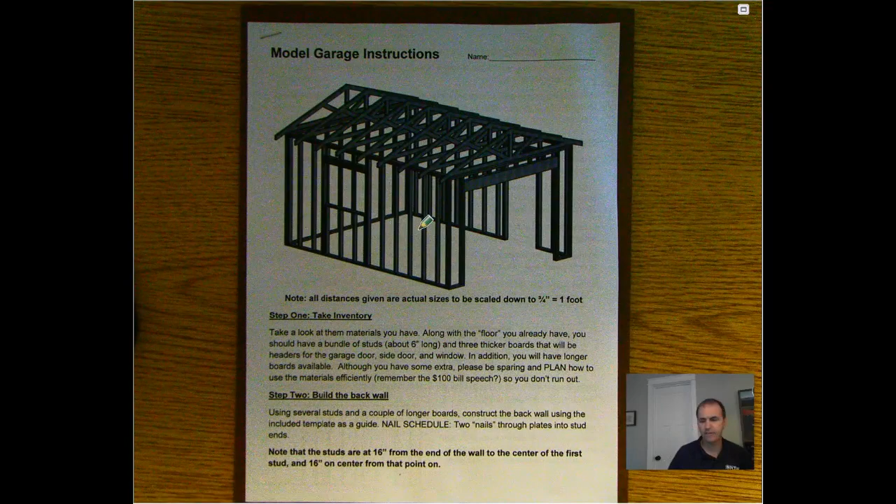Step 1 is to take inventory. Let's take a look at what we got. So along with the floor, this is the floor. You should have a piece of 1/8 inch hardboard, or maybe it's 1/4 inch board, depending on what we're doing. That's going to serve as the floor. This is a 12 by 16 garage, which means that scaled down to 3/4, this is a 9 inch wide by 12 inch long board.

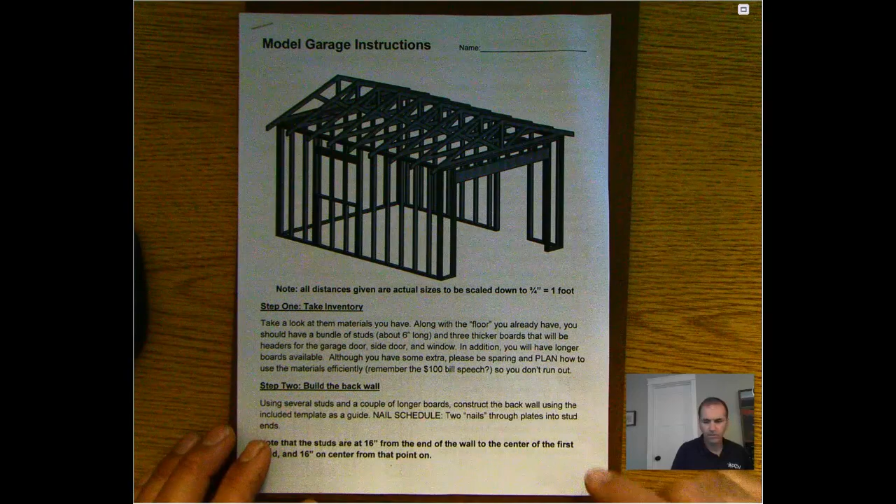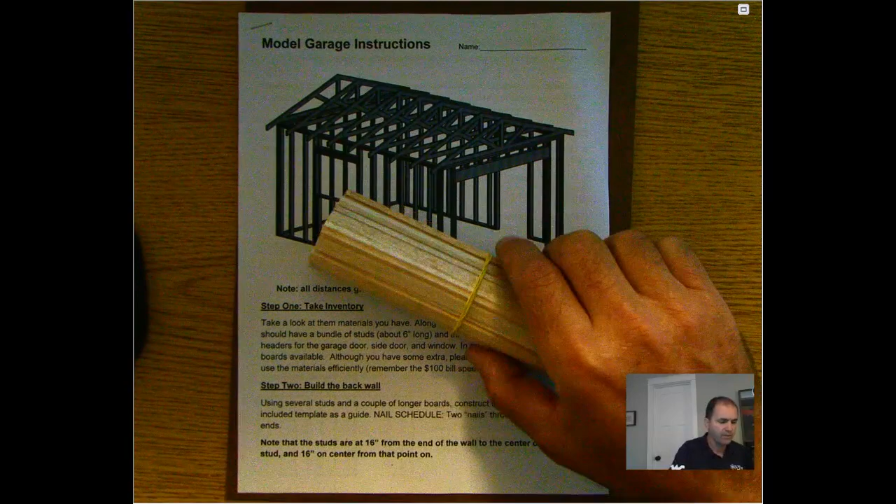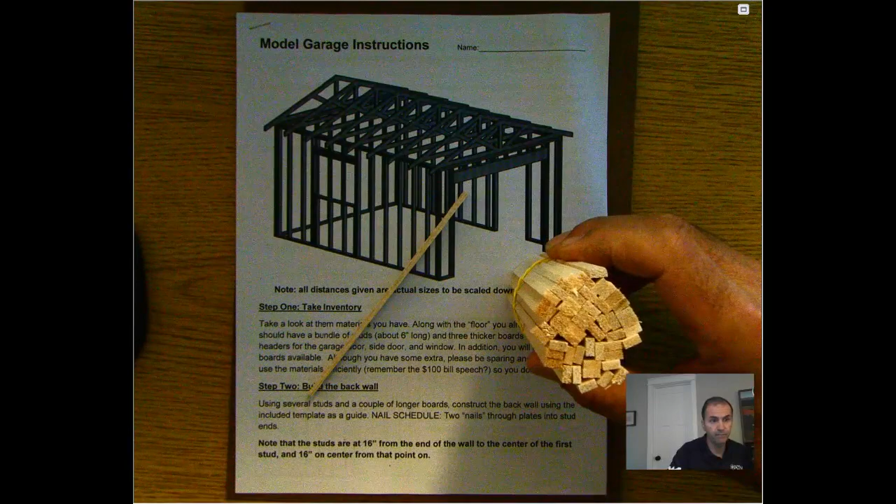Excuse me. So let's take a look at what we've got. We got the floor. You'll be dealing with that later. You should have a bundle of studs that look like that. Now the stud, just like if you were to go to the lumber yard or go to Home Depot and buy studs, is a very specific length. And that's why they're all the same, because that's going to be the length that when you add the bottom plate and the top plate and the double top plate, this becomes about 1 inch longer than 8 feet.

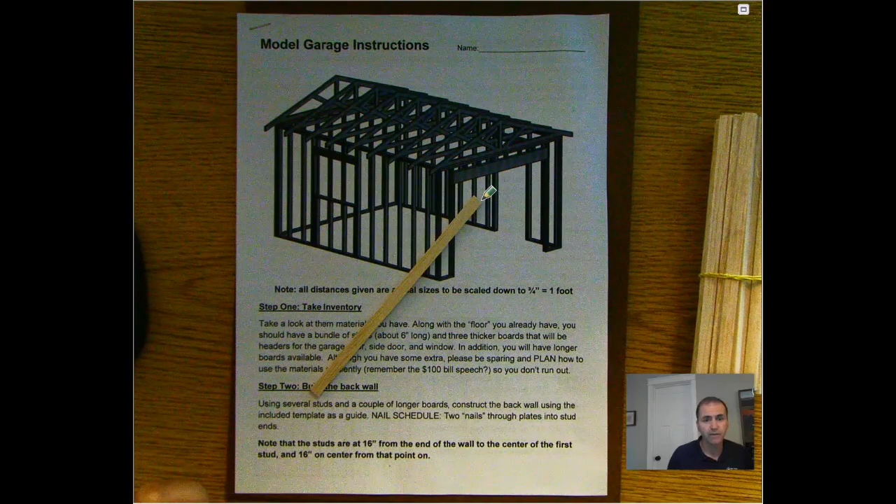I don't remember the exact specification of that, but it allows for a piece of drywall on the ceiling, and then your sheet of drywall, or 2 if they're horizontal, down the side, and a little bit of extra space. So they're designed to be that way. And there's 8 foot, 9 foot, 10 foot studs. So for an 8 foot wall, we have 8 foot studs.

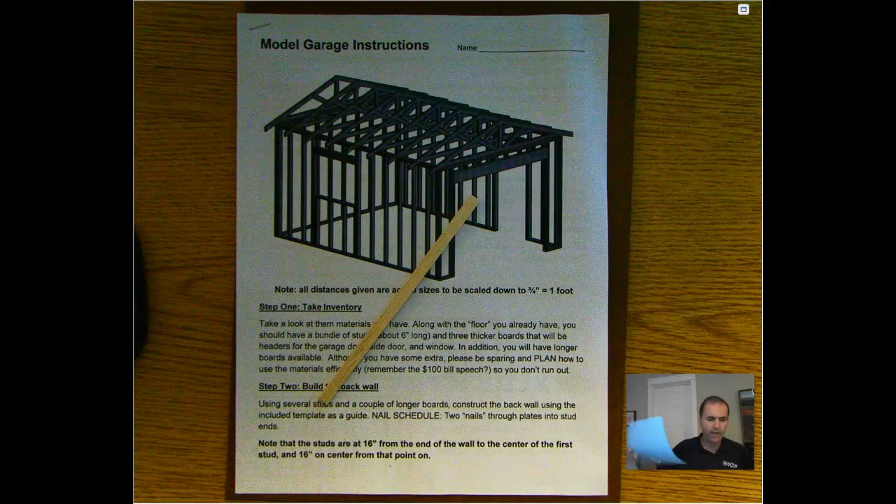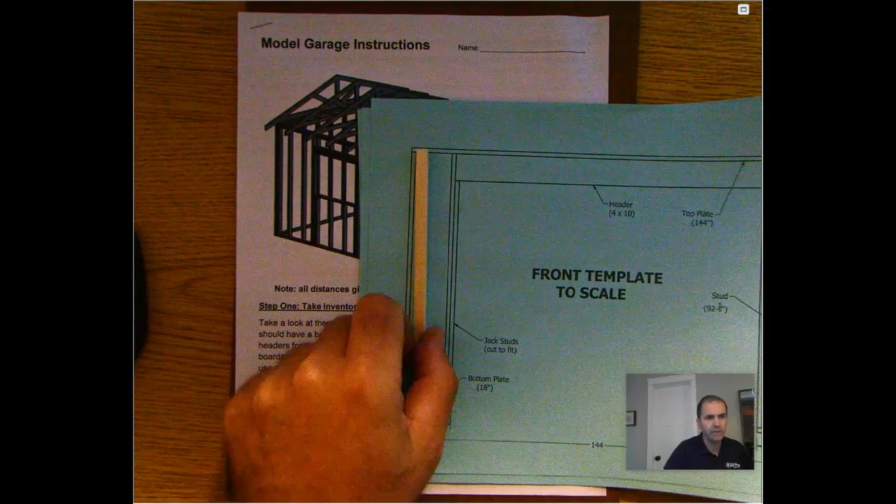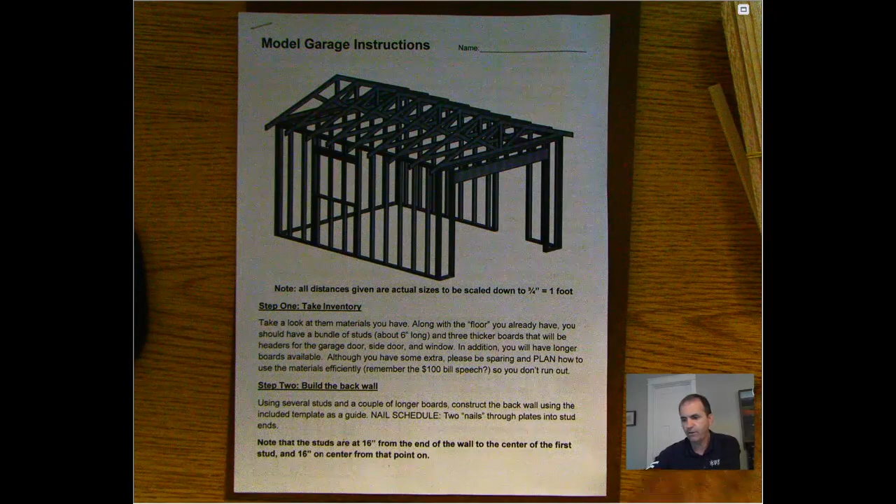Now it just so happens that if you take a look at your templates, that piece is already exactly the right length in your template. Okay, so that's going to work out really, really well. All right, so you have these. You also have some thicker boards that are like this. This is your garage header.

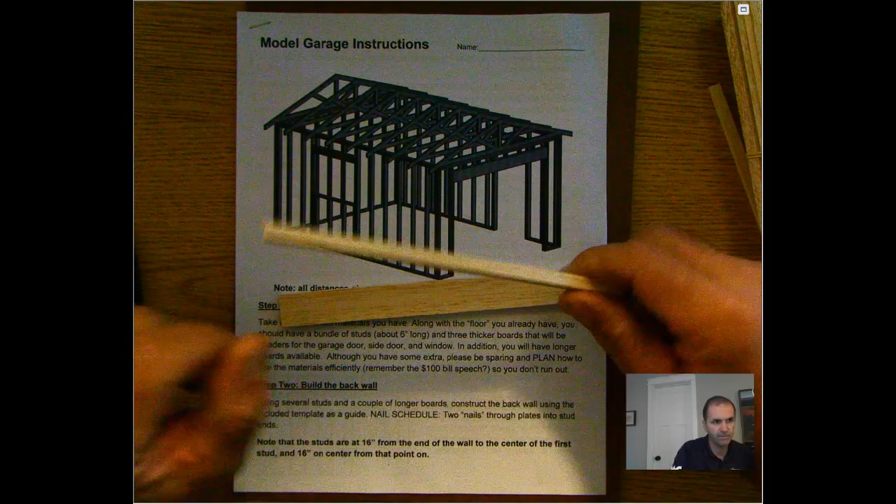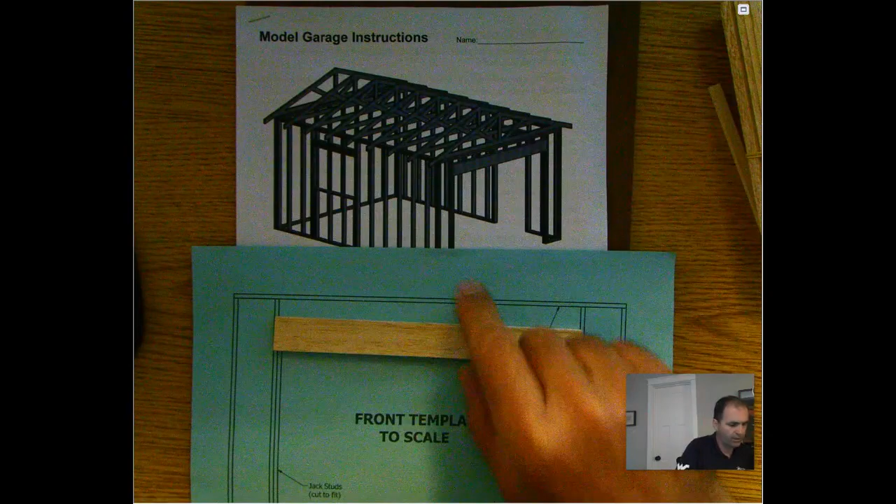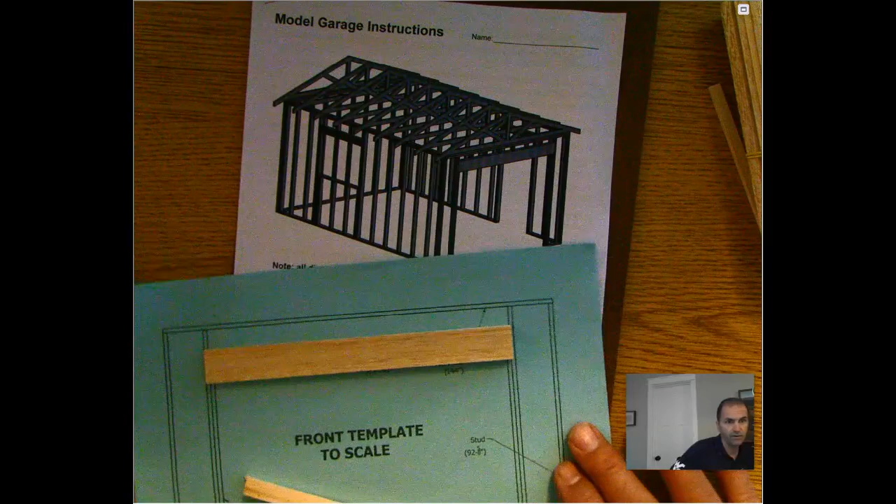Now it's already cut to length, and then you have a door and window header that you're going to have to cut. In fact, they're just broken on the ends because that was the easiest way to get you your materials, but you're going to have to cut them. If you take a look at your big header, it is already cut to the exact size. The camera kind of flares out a little bit, but if you look at it, it's exactly from one end to the other end. It will fit exactly in that space.

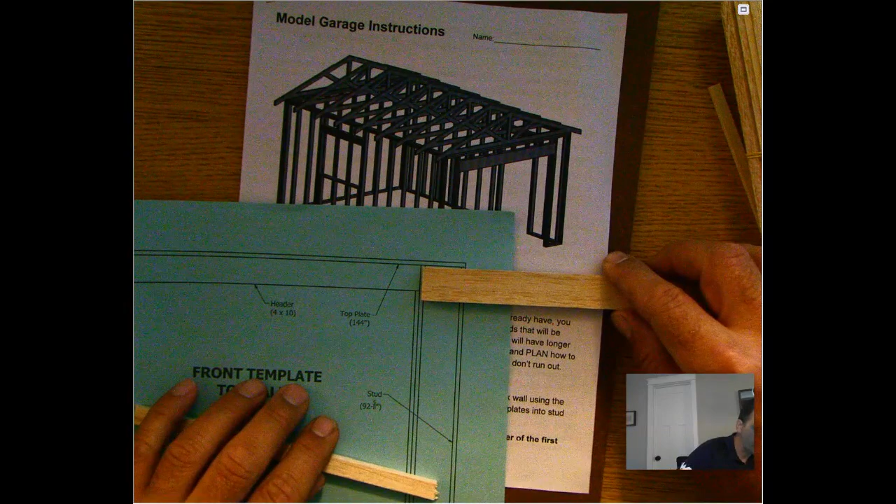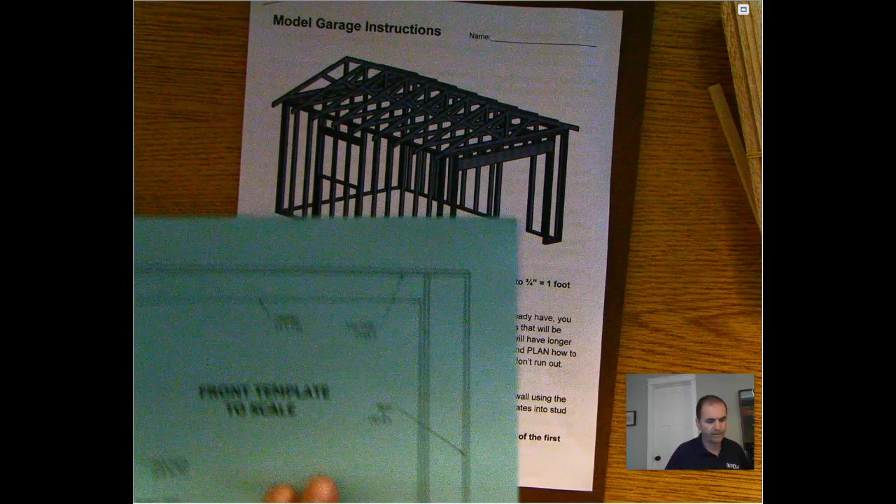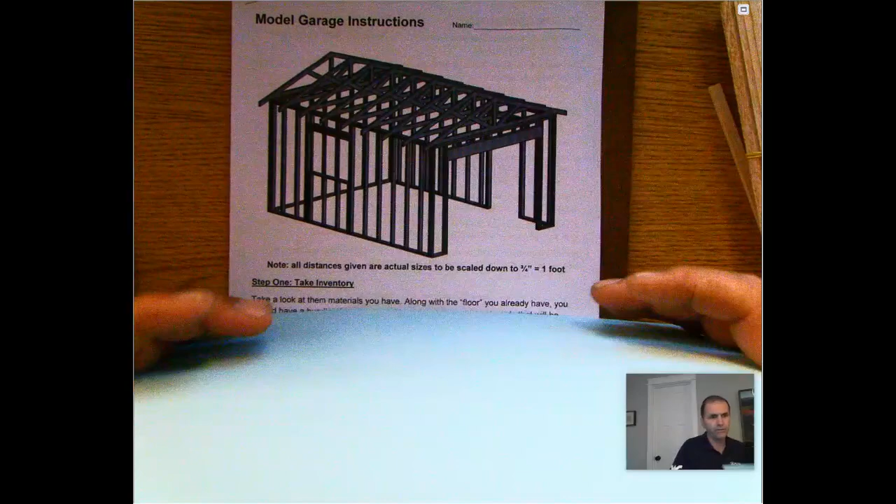Now, one thing that you see is that this is actually a little bit narrower than what you're actually getting here, but that's okay because you're going to do your jack studs last. All right. So you have those. You have your templates. You have an extra for each one of these. Now you're actually going to use these to build your walls and your trusses to exactly what the size is on the paper, because this is already to scale. So make sure that you don't do anything else with those.

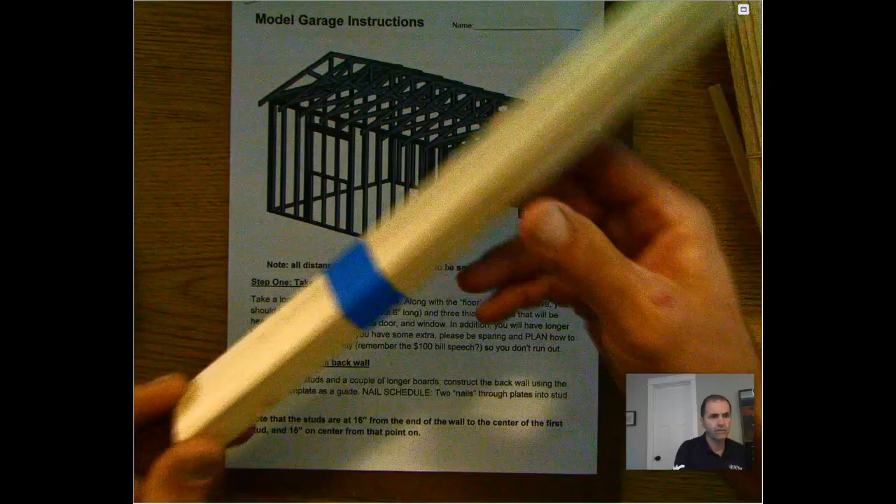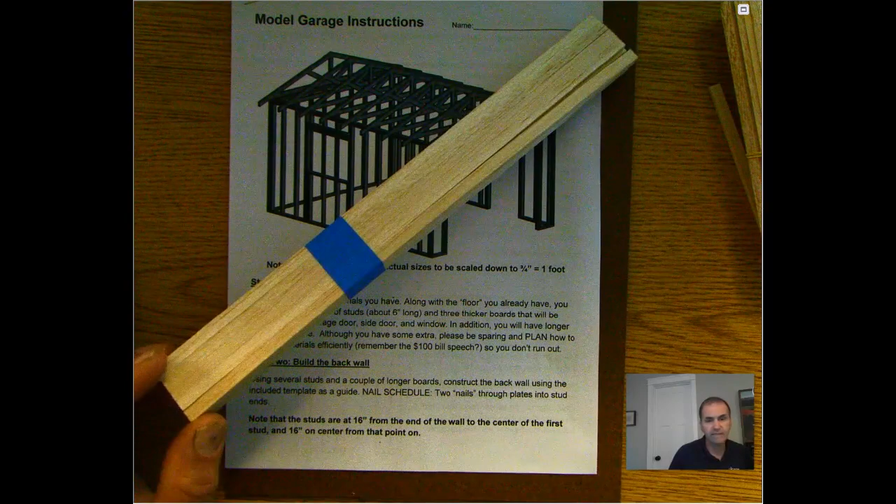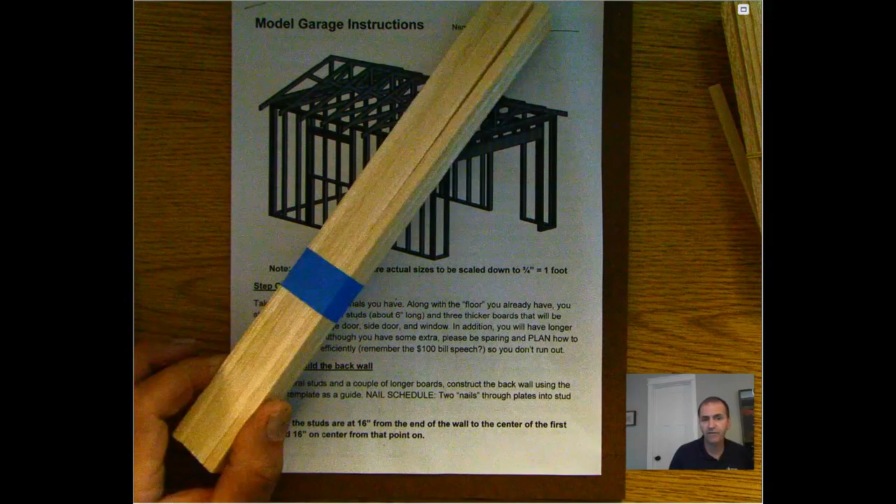You also have either access to a bunch of longer pieces, or I've given you, in this case, a set like this. And these are going to be used for your top plates, your bottom plates, your sills; anything that's not a stud or a jack stud, you will be getting out of this set. Now, I have given you somewhere around 20% extra of all of this stuff. So if you mess it up, it's kind of up to you to make sure that you are planning ahead. So let's look at some tools.

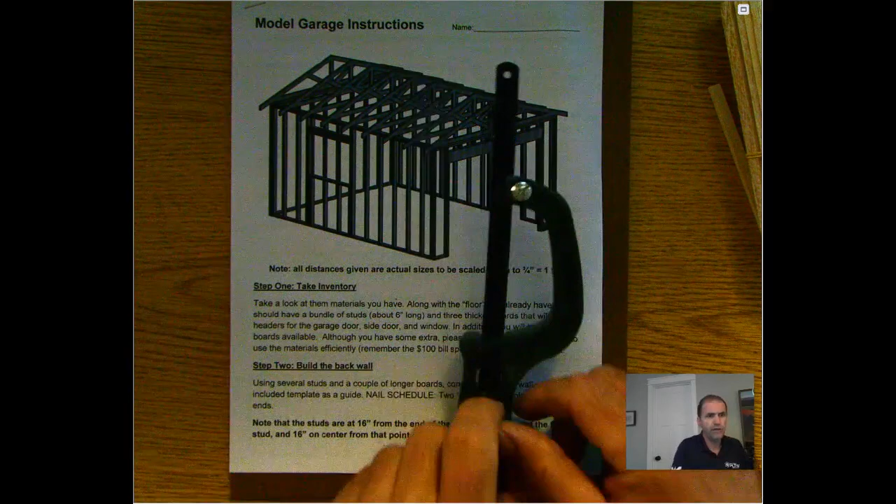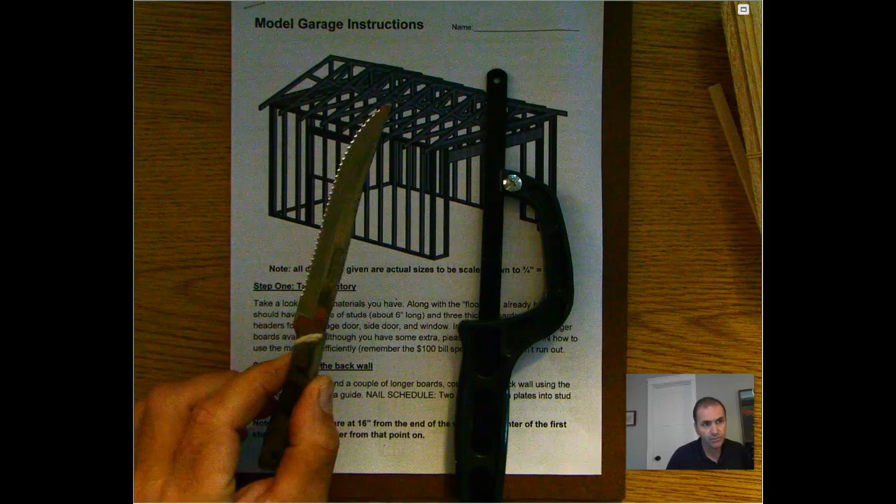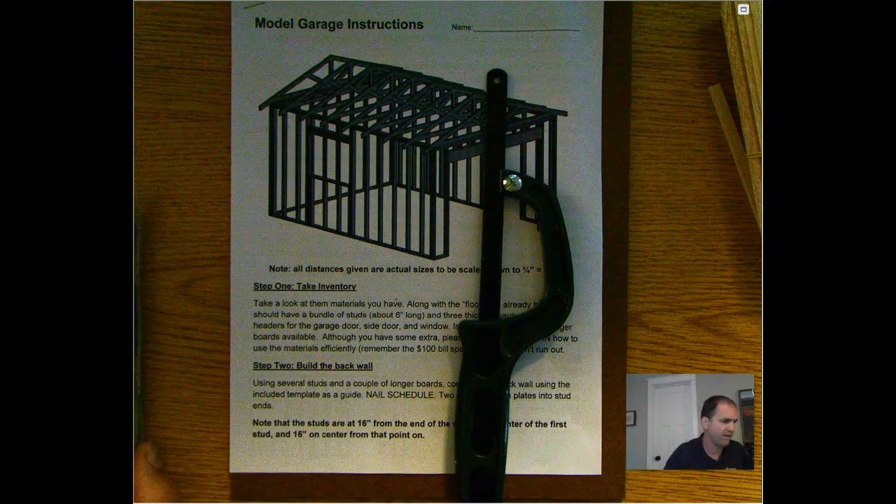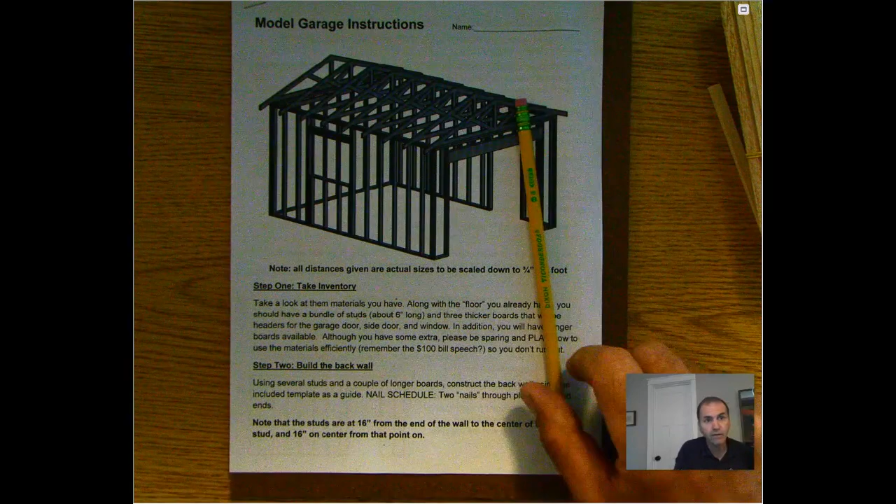You should have a little saw that's like this. Some of them are silver, and that's for cutting your pieces to length. A serrated steak knife like this actually works really well too, and it might even be easier to use. It's got to be serrated because you've got to be able to saw through the wood and not just push it. If you push through, it'll crimp the end and make it not easy to use. So you've got that stuff. And, well, not lastly, I got one more thing. You've got a pencil. That pencil is going to be your hammer, and I will explain why in a little bit.

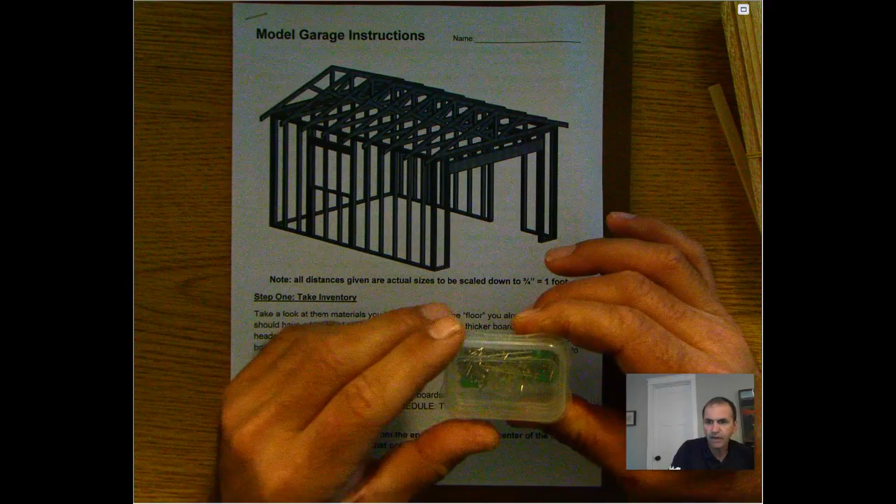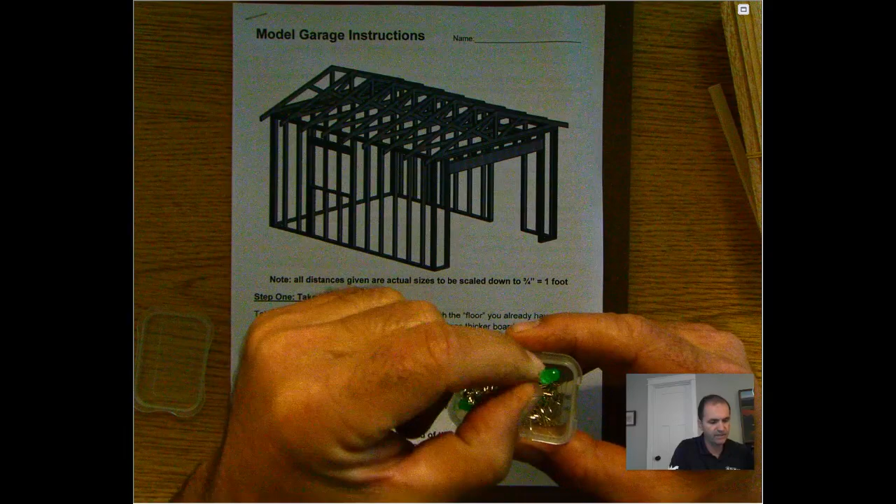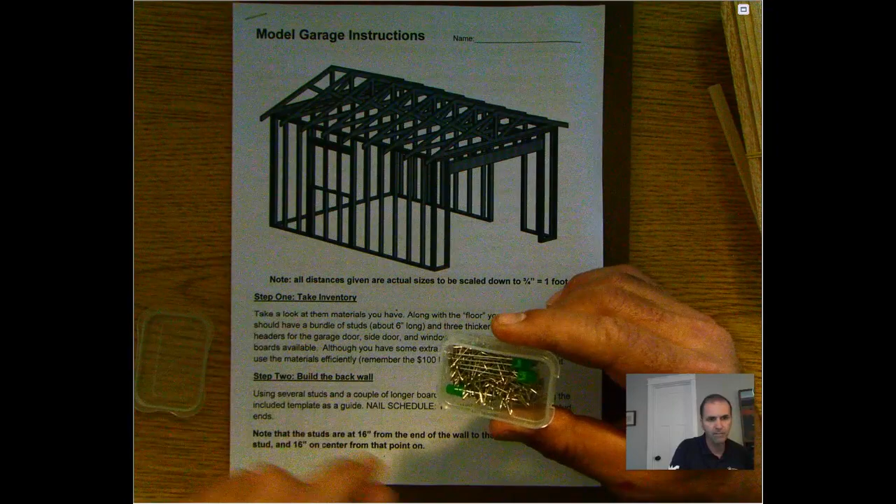The last thing you have is you either have a round container with a round colorful top, or you have a little kind of rectangular guy with your nails in there. Now this happens to have, at the time I make this, I also put 3 little LEDs in there that we're going to use for an electrical project. Please gently and carefully set those aside somewhere. We will be using those later, but we'll be using those nails now, and you have, again, more than you need. So we'll talk about how to do those in a moment.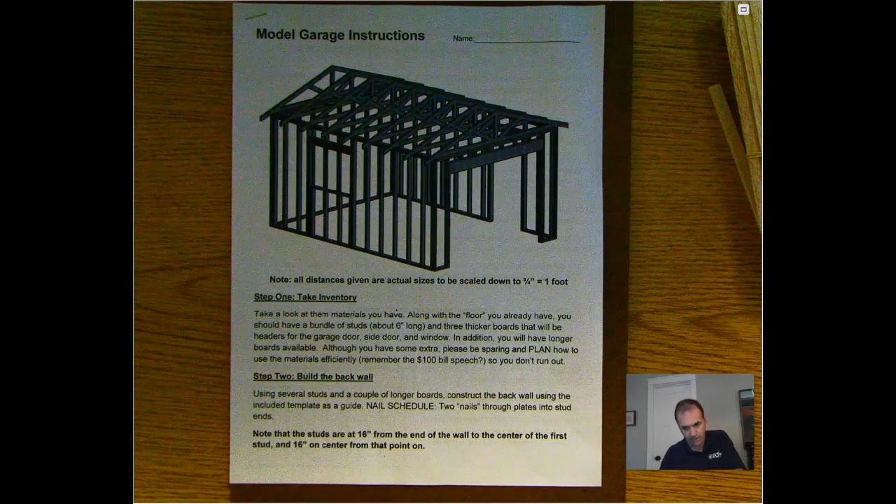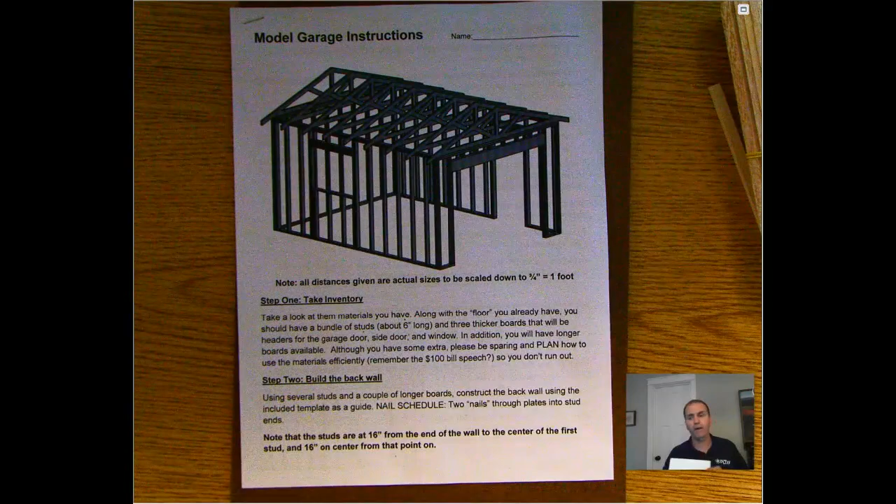All right, you also have folded in half some 11 by 17 paper, and you're going to need these to design the side walls. So make sure that you keep those somewhere handy because an 8.5 by 11 sheet of standard paper isn't big enough. So that's why you have those. All right. So it says, although you have some extra, please be sparing and plan how to use the materials efficiently. Use only what you need and in a specific way that I'll talk about in a minute. It says, remember the $100 bill speech? So you don't run out.

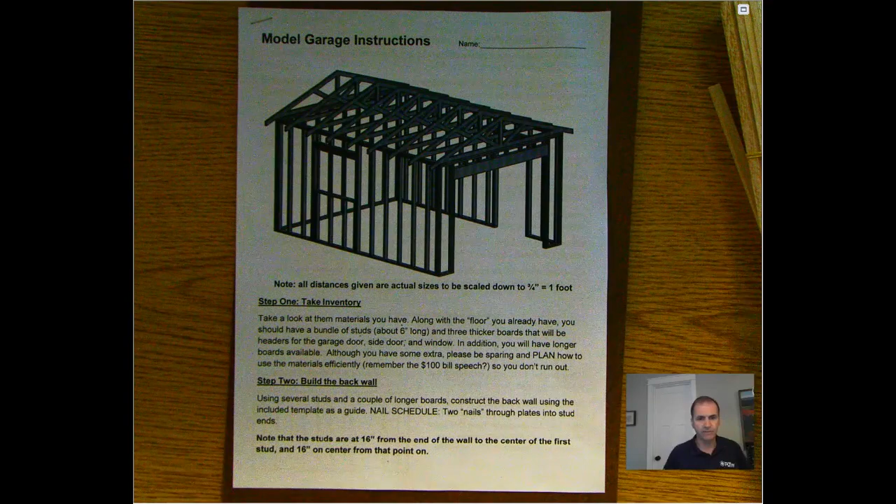Now, you may not have heard this $100 bill speech, so I'm going to give you the $100 bill speech. So let's say that $100 bills came in various sizes and shapes, okay? And somebody puts a stack of those in front of you and says, okay, you can keep as many as you can fit on this board right here, as long as none of them overlap or hang over the edge. If it hangs over the edge, you don't get it. And if it overlaps with another one, you don't get either one of them. Okay. You would figure out the most efficient way to lay those $100 bills out. I guarantee you would, because you would try and keep as many of them as you possibly could.

So the same thing happens with lumber. If you need a piece of lumber that is, say, this long, don't cut it out of a piece that long. Find a piece that you can take from that is providing the least amount of waste. Because if you cut through all of these for smaller pieces, one at a time, and you leave just kind of a random bunch of stuff, you're going to run out of materials. So you need to think, I'm going to need my longer pieces later. I need to keep my longer pieces as long as possible until I need them. So that's really, really important.

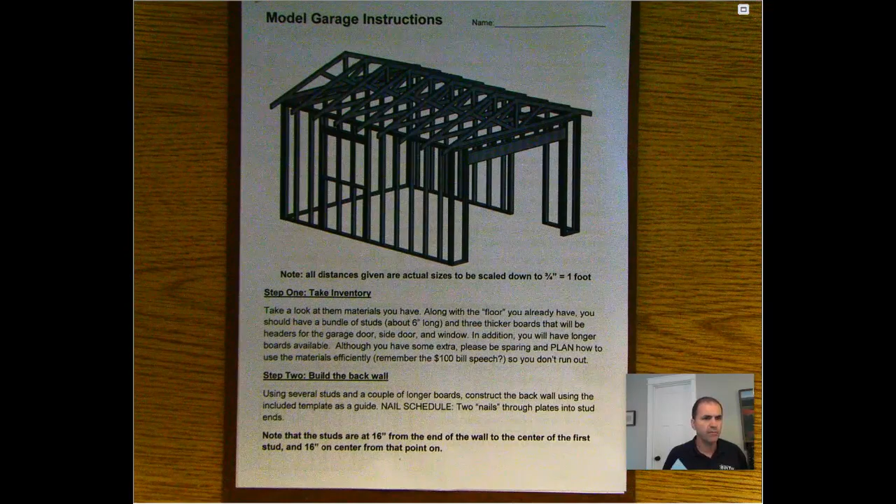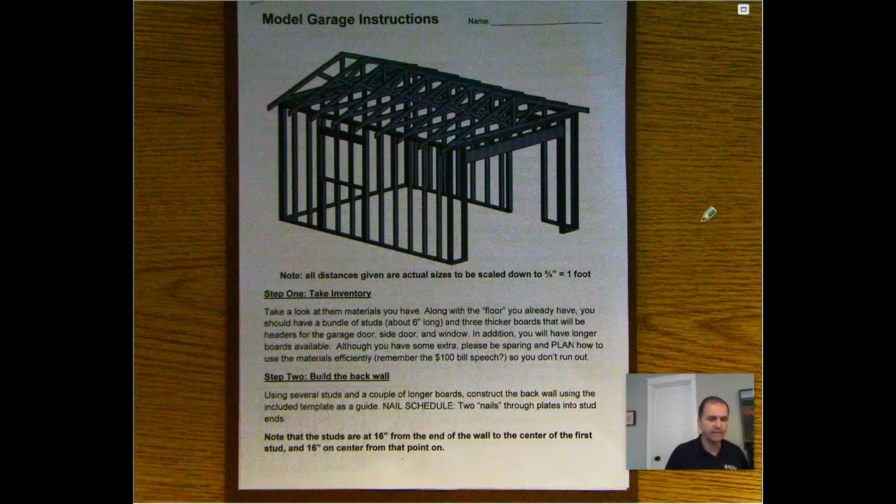All right, let's talk step 2 here. You're going to build the back wall, and we're going to use several studs and a couple of longer boards. And the nail schedule, that means how many nails you have to use per something, is you're going to use 2 nails through the plates into the studs on the ends. All right, so here's our template. It's all ready to scale. We're going to use this to cut our pieces.

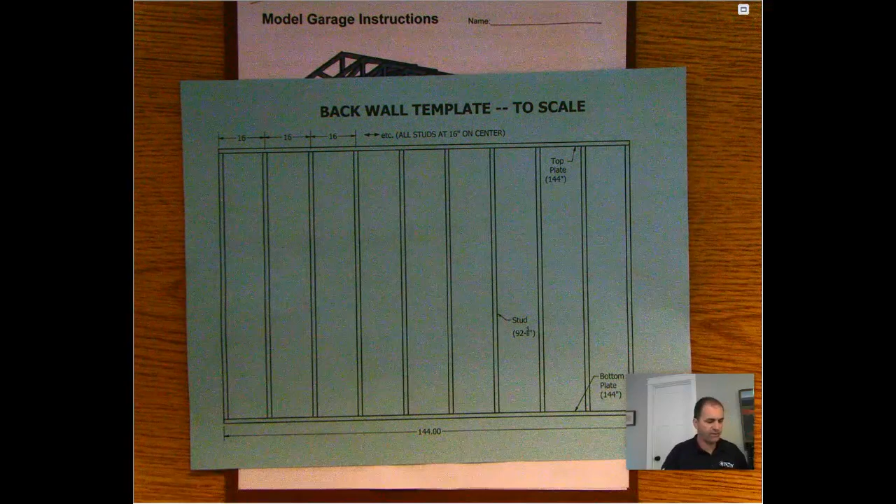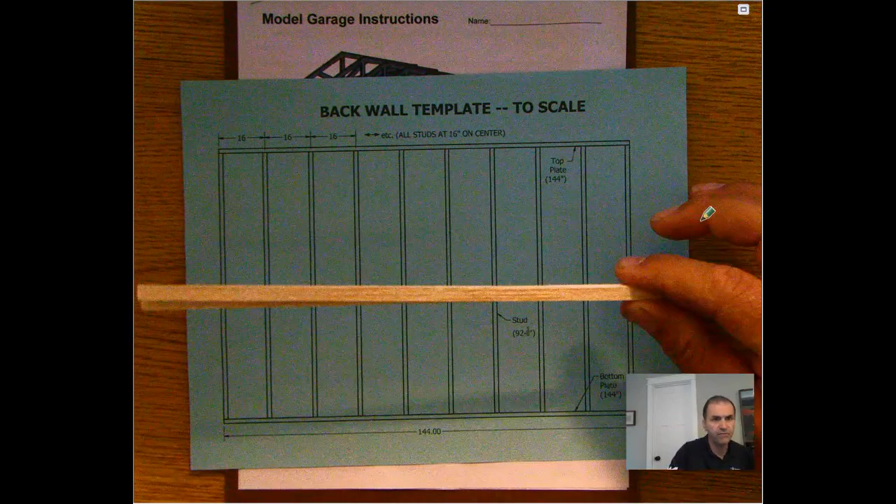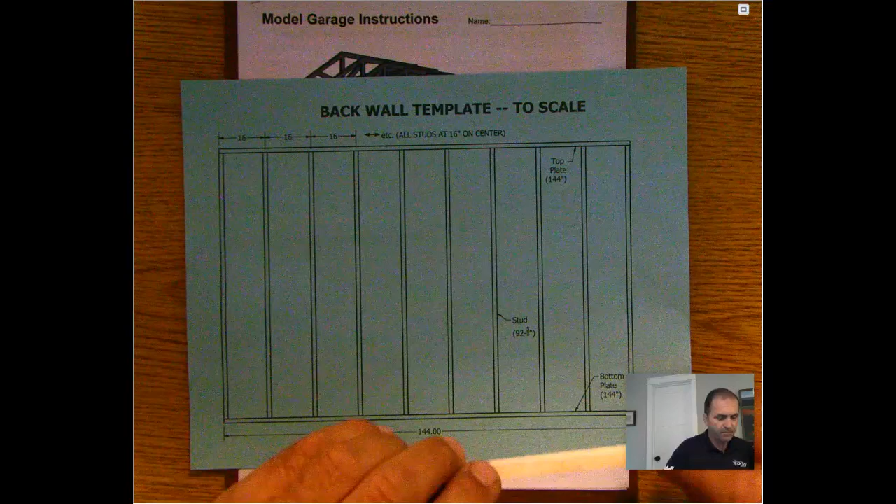So we need to get a couple pieces out of our stack of longer lumber, and these aren't long enough to be able to get both of these out of one, so we're going to have to cut 2 of them, and we're going to cut them and use the template. The template is going to tell us, so I line it up with one side, and I actually have 2 of them. I'm going to cut 2 of them at the same time.

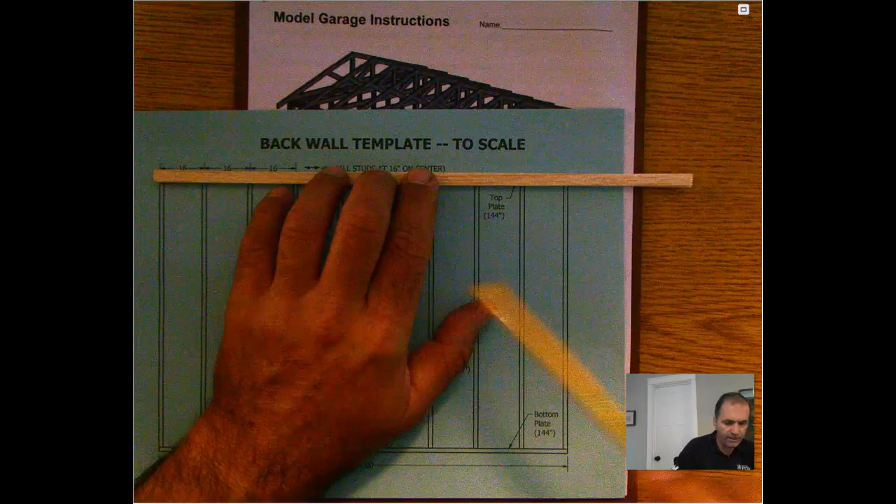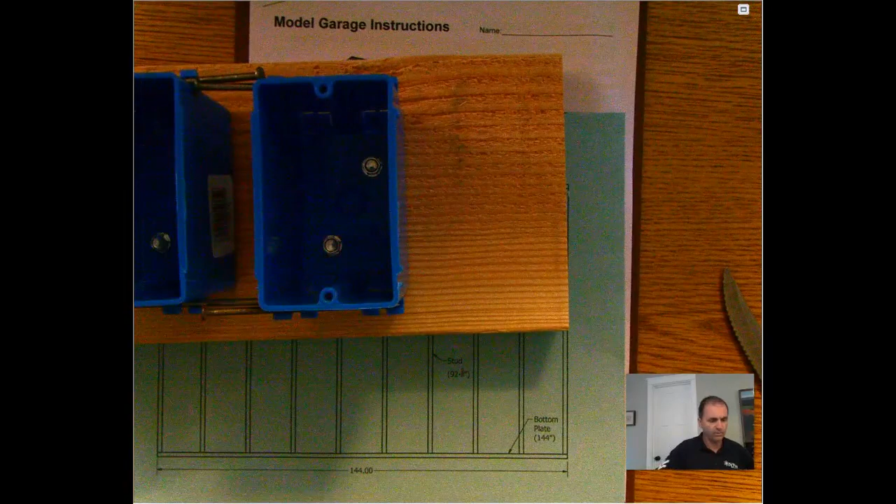Now, this looks like it's sticking out too far over here, but that's just because the camera angle is making it look that way. I have it lined up, and over here I have it lined up. I'll use the saw because that's what you guys have, and I'm going to make sure that I'm exactly lined up with the end, make myself a little mark. Now, so I don't cut into things, what I would do if I were you is use this big old thing that you've got for your electrical that we're going to be doing later on, or any board that's going to serve as a cutting board.

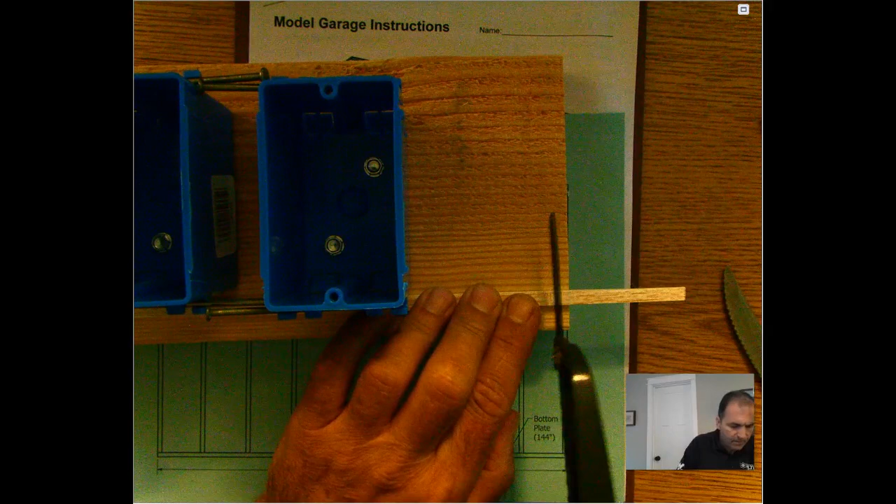Now make sure, see where my mark was, that I'm square. Okay, so I'm using this to make sure that I'm cutting at 90 degrees. If you get off like this or off like that, it's going to be a little weird and a little off. So just little saws. Let's see how my steak knife does.

Oh, yeah, that works out pretty good. So if you've got a steak knife, it might actually be a little easier to use the steak knife, but you do have to kind of drag it and cut it, or you will not end up with a nice clean edge, and you'll squish the edges if you push into them.

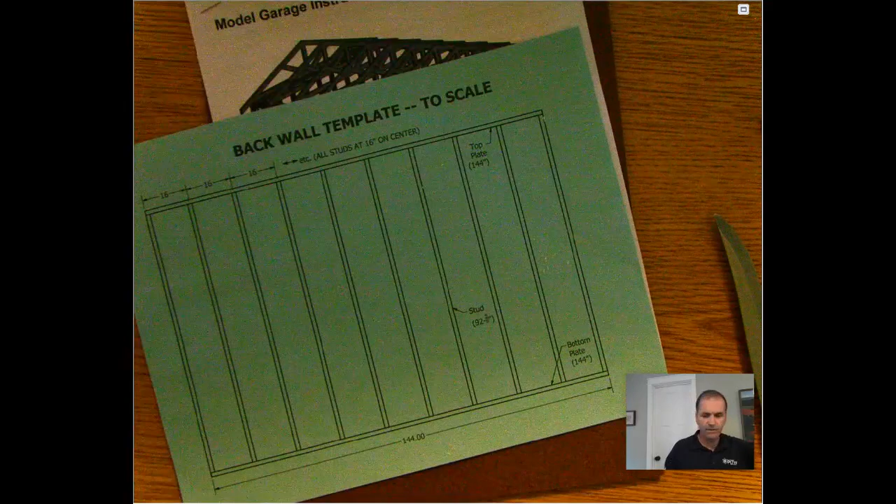Okay, so again, try and make sure you cut all the way through. We want a nice square clean edge like that, so it's similar to the other side. Not crooked, not squished, not anything like that. All right, so now we have our two pieces. Now, these little leftover pieces, don't throw them away, because you might be able to use them for the trusses or for a windowsill or something like that.

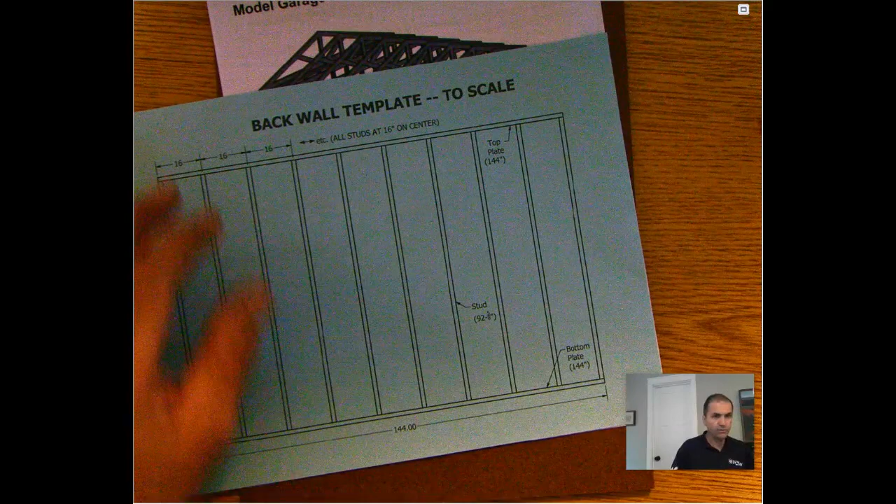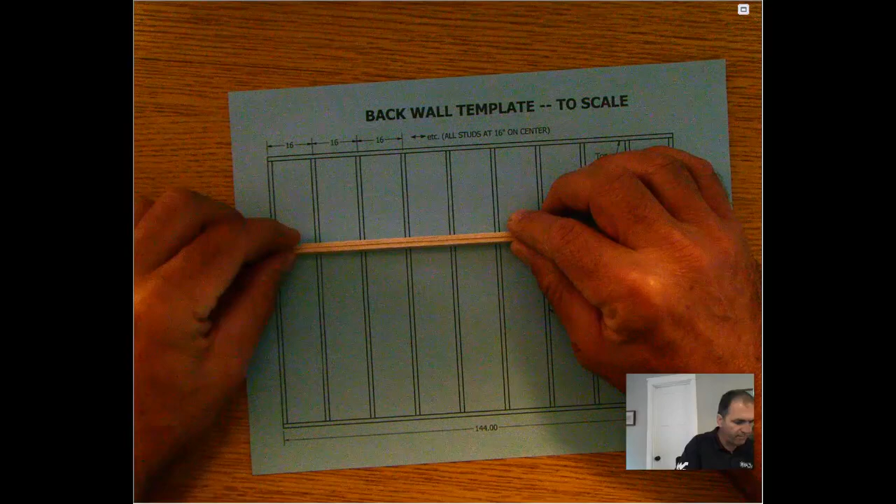All right, so now that we've got those two pieces, set this aside. We need to mark where the studs are going to go, and we're going to do this almost like in actual building. In actual building, we would lay this out, measure, and mark on each one of them where each one of these studs are. Now, it's a little easier for this project to flip them up and make your marks. You don't have to do it on the ends because the pieces will line up with the end.

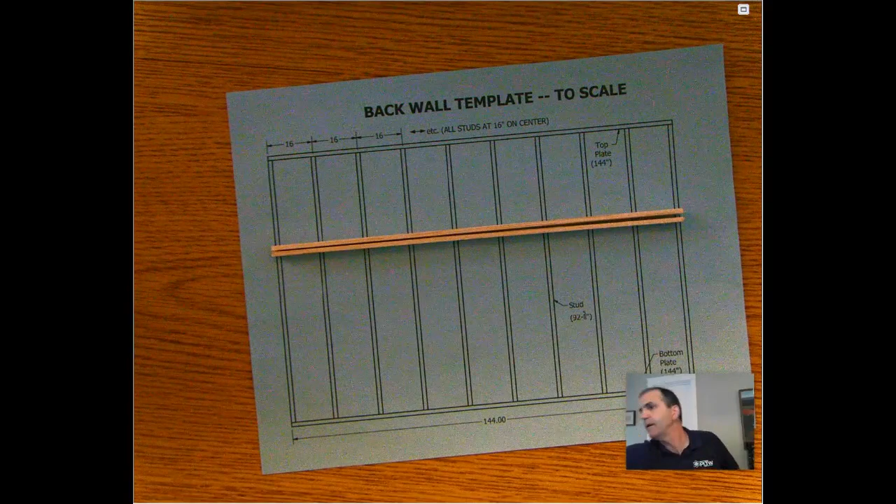But you need a pencil, which I seem to have misplaced. And we're going to mark everywhere there is a stud, and make sure that I'm, again, looking straight down, because it's a little easy to get off. We're going to mark across at each point. Now, it may look like I'm off, but that's because of the camera angle. I'm making sure that I'm exactly straight, and I'm making my lines across both

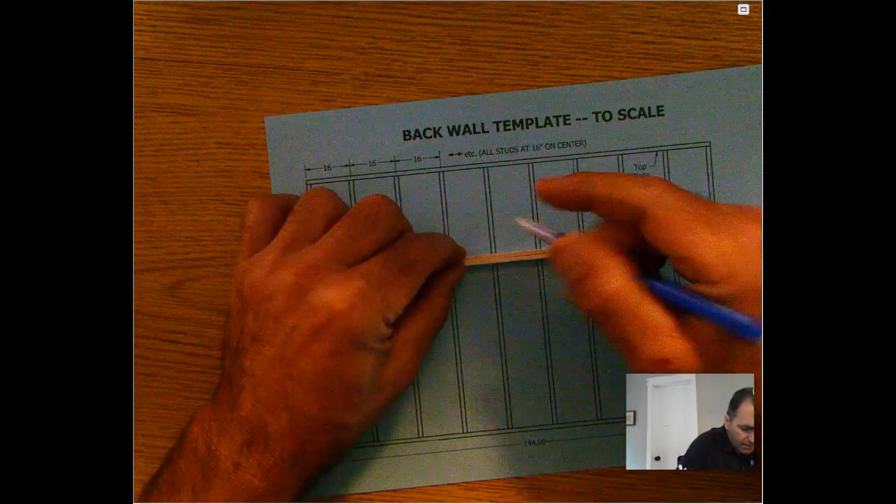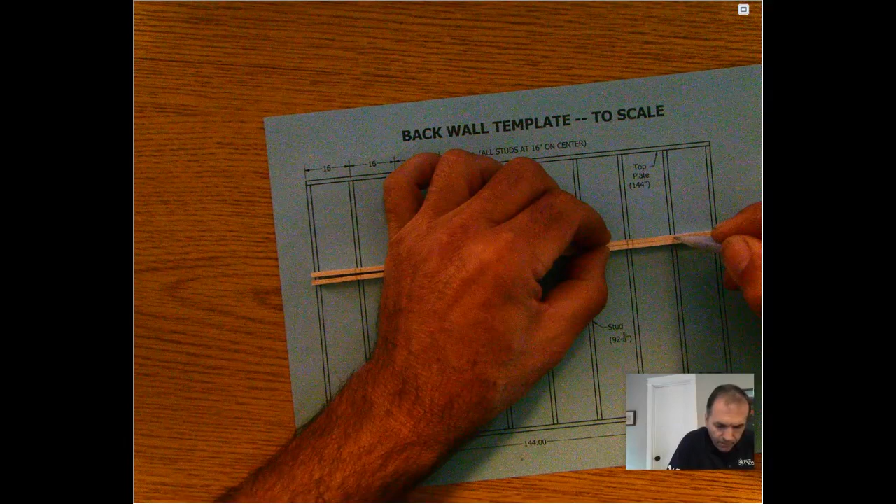of those guys. Now, again, if we were actually building, we'd be doing this on the face and not on the edge, but it's a little bit easier for us to see that on this. Dark enough so you can see them, but not dark enough to be distracting. Cool, so we've got our little pieces there, and we know where the studs are.

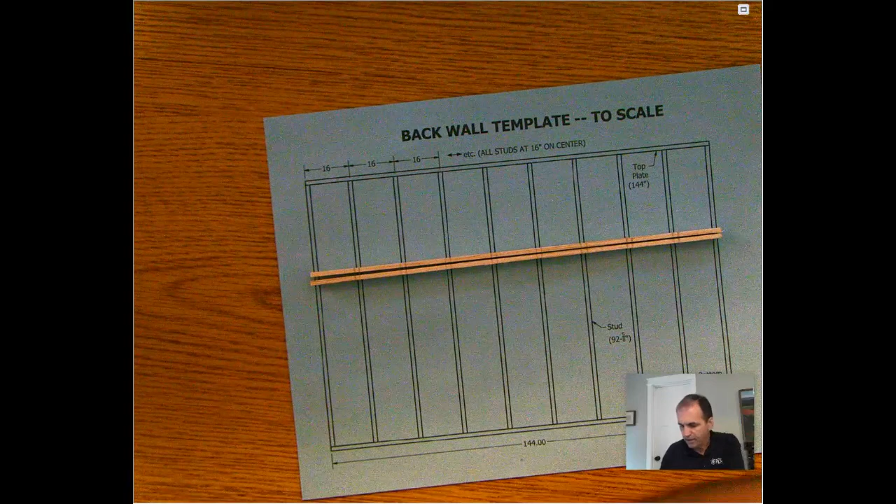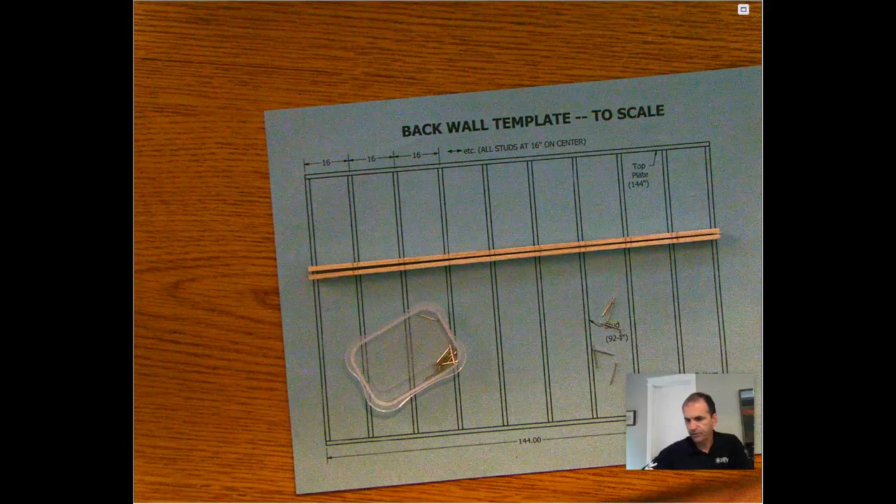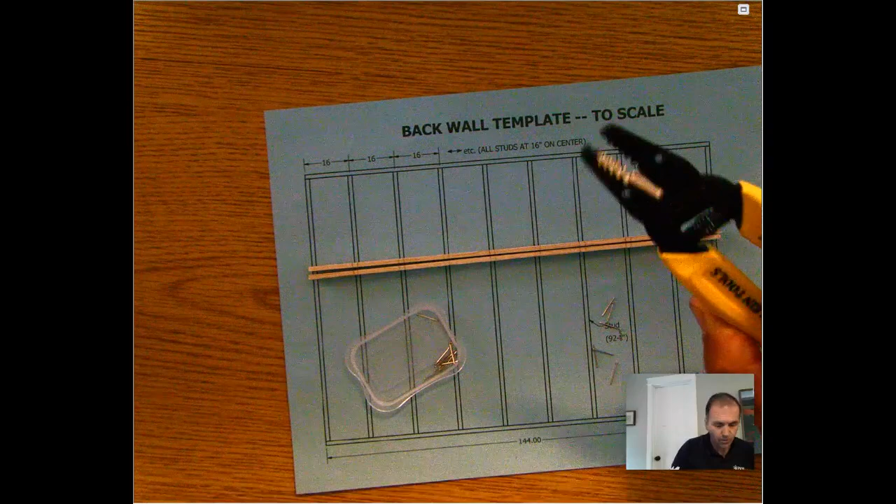Now, there's a couple different ways you can do this in dealing with the nails. The nails are kind of tricky to deal with because they're so small and they're kind of hard to get a hold of. But I'm going to get a few of those. And what I like to do is get a pair of needle nose pliers, or you actually have a set of wire strippers. And on the end, there's a little place where you can hold these. You might have some that are blue or red or whatever, but they all have a little spot on the end where you can grab that nail.

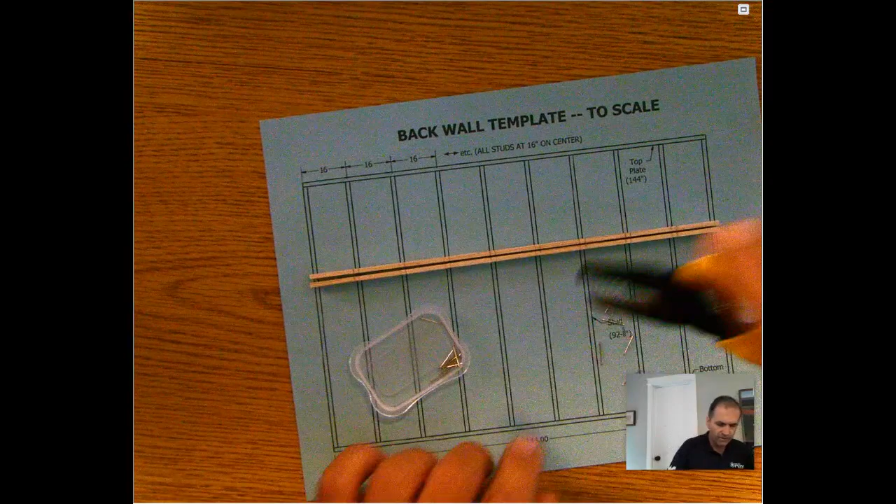Well, it's a little hard to do that. So again, this is kind of tricky. All right, got my old man glasses on. So now what works pretty well is to hold... Well, these yellow ones don't work as well. If you've got a pair of little needle nose pliers, it might help you a little bit better.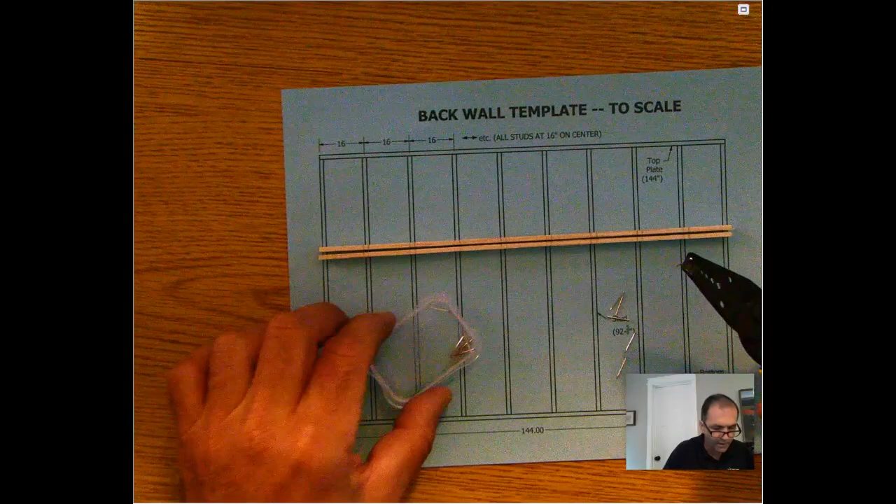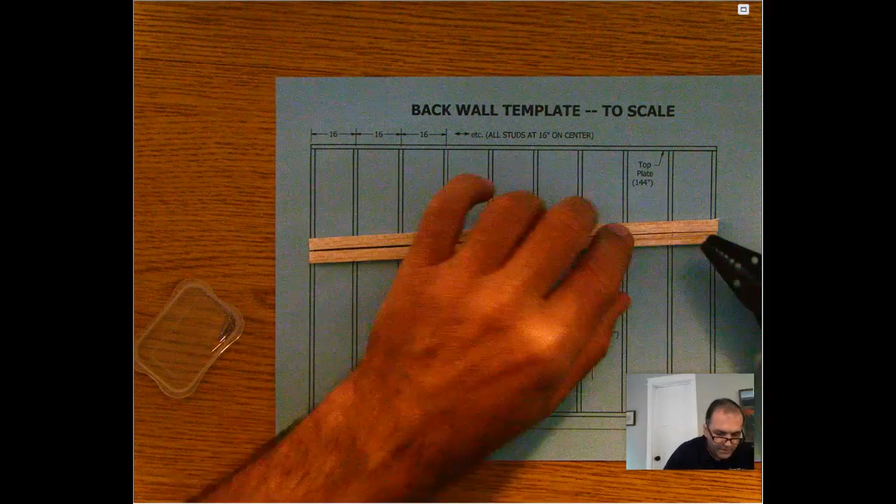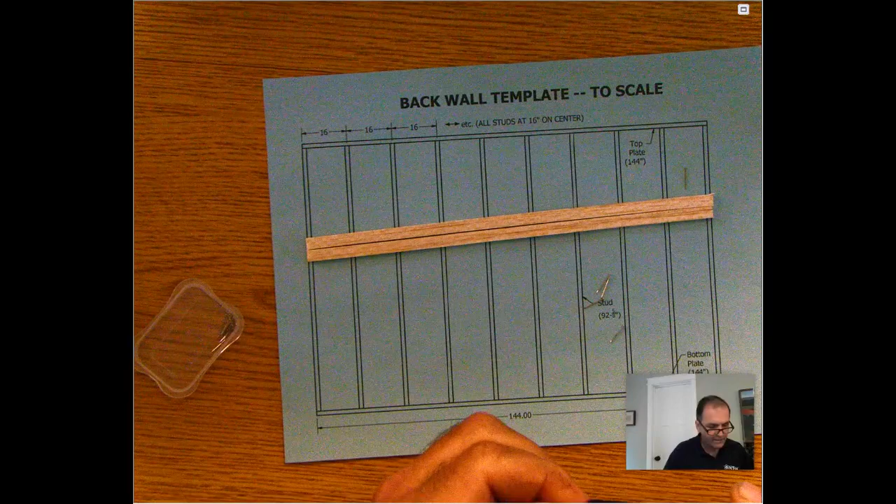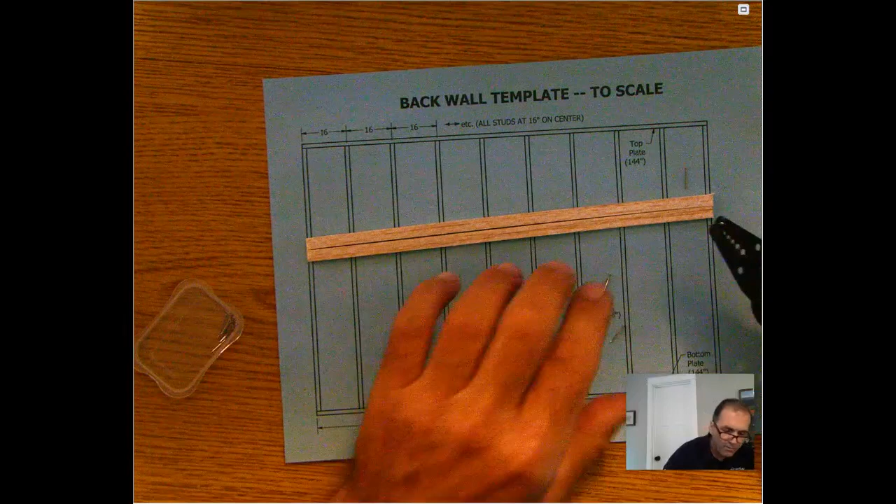And what we're going to do is everywhere where there's one of those marks, we're going to put a nail and start it. Whoops, that one fell out. See, this is where it's okay because you're learning to be precise and hold on to things. Boy, if you don't have one of these yellow ones, you probably got ones that are a little easier to deal with, the red pair or the blue ones. It just helps you hold the nail there. Okay, a pair of tweezers might work too.

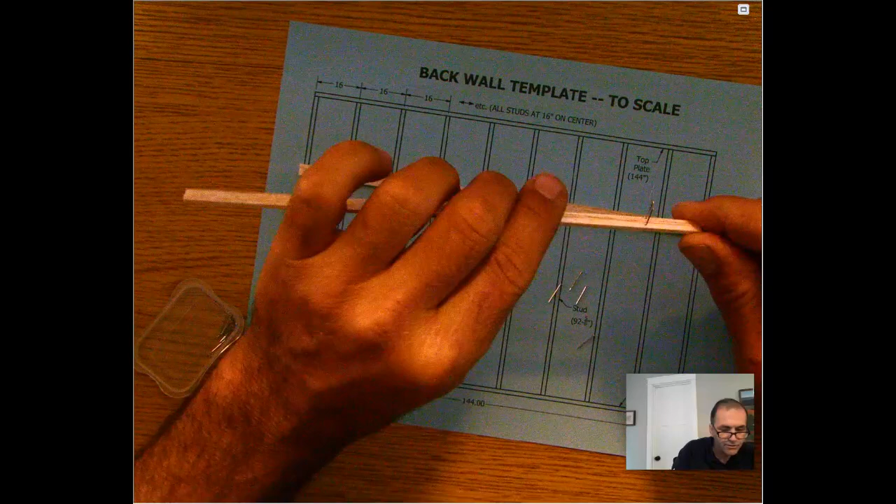And you're going to have a nail on the top and the bottom. So you're going to have one there, and you're going to have one that is on the other side. If you can do it easier by hand, then do it by hand. Okay. And we're going to end up with 2 nails at each spot, and you've got to be lined up and make sure that you're there. See, even that little nail is a little bit off to the side.

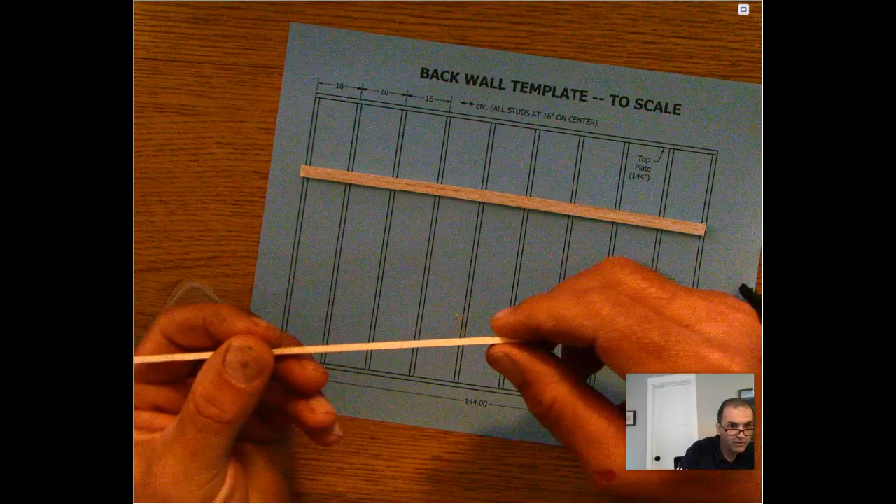Now, that's okay as long as I make sure that I angle it a little bit inward when I drive it, and angle it that way just a little bit. It's a little hard to see here, but other than that, you've got to make sure that you're lined up. So we're going to again put 2 nails per each spot where a stud is going to go.

All right, so I wanted to show you some mistakes that I made before I continue on and zoom in, not out. So this one, if you take a look at my pattern, was obviously one of them. That one was not following the same pattern, and when I looked at it, I went, oh, I don't know how I ended up outside of my marks. So I'm going to have to adjust that.

Now I grabbed a pair of needle nose instead of, you might find that's easier. Oops, I didn't mean to go all the way through like that. So you might have to make some adjustments. And again, this is one of those things where it can be frustrating, but there's nothing wrong with something being a little tedious and frustrating. Make sure, and like this one is a little bit over to the edge. So I think I might readjust that and move it over a little bit.

Now, right now, it's kind of up to you as to whether you want to do the other side or not, or wait till after you've got the studs in. Personally, for me, I think it's easier to set all the nails first, so I will set those on each side. It just makes it a little harder to get to both of them at the same time, but then you're not fighting twisting of the studs.

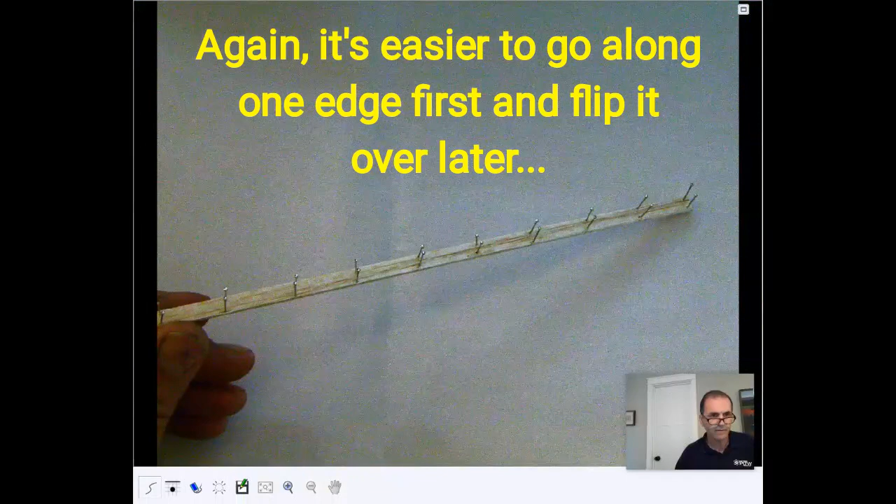All right, so I got my top plate or bottom plate ready to nail. Make some adjustments. Like this little guy right here was kind of off to the edge, so I might have to adjust that. And some of your nails are going to fall out, and it's going to be a little tedious, but you'll figure it out. That's part of the learning process, right?

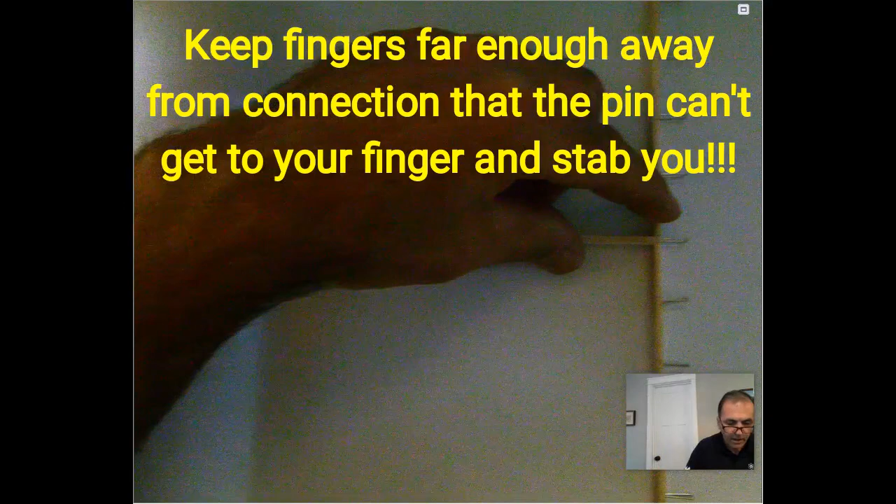All right, so now I need 1, 2, 3, 4, 5, 6, 7, 8, 9, 10 studs to build this wall. So I'm going to grab my 10 studs and start getting ready to lay this out. Now, here's how I like to do it. I'll start in the middle, just give myself something that sort of holds things together. Line up your stud. Now, here's where the hammer comes in. You're going to hold both of these together, and then use your pencil. This is your hammer, right?

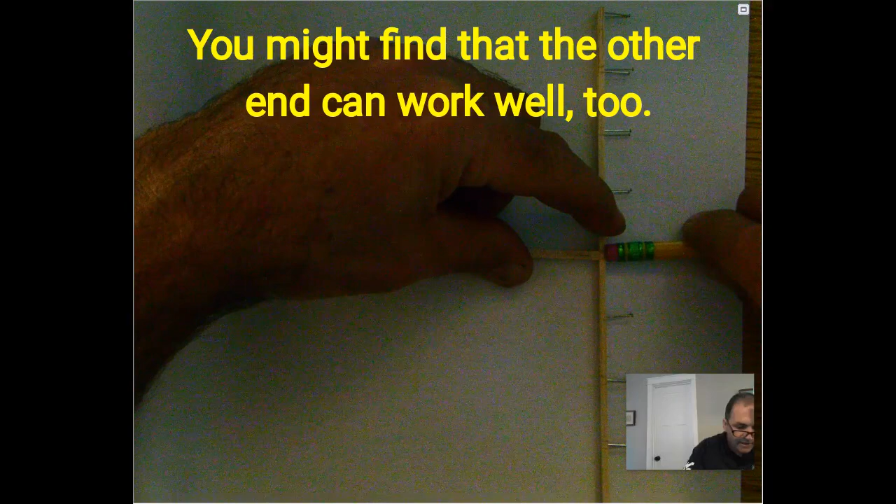So the eraser works really, really well for you to take that, whoops, and I already have a problem at the very beginning with it coming through. That's called a shiner when that happens, because it sticks out. So I should have adjusted for that a little bit. And look, I bent 2 nails over there. So you're going to have the same frustrations that I have.

So this time when I drive this, I'm going to try and go down at a little bit of an angle like that, so that it doesn't come through. So make that a little bit of a habit. See how I'm pulling upward on it? It's a little hard to see with the camera, but I'm actually going downward a little bit so that I don't. Good. Cool. Now, I think what I'm going to do is leave that other one on the other side. I'm going to flip it over.

So, at this point, maybe I regret doing both nails on both sides. I probably should have just done one and then flipped it over and then put the other one in. In the actual world, now see how this one is off to the edge. I'm going to angle that a little bit so that I'm making sure that I'm going in there. Again, hold them both with my finger at the same time. And I'm going to angle in a little bit.

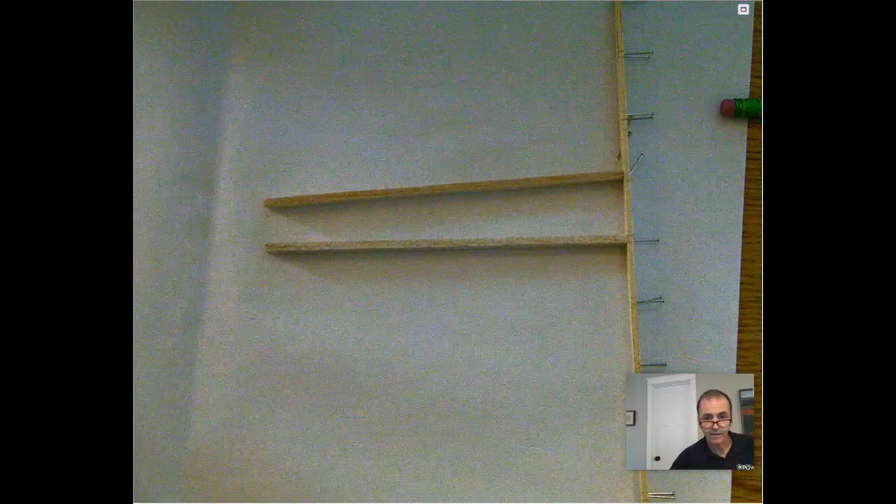Right, now that I put 2 in there, you'll see that they're all kind of coming off at different angles. That's okay. We're going to fix that later. So now that I'm working on it, I think I would suggest that you only do 1 nail in one side first, rather than 2. And see, that's really easy to do where I'm in my own way, but I, again, gave it a shiner, so that's okay. We'll have to start that one over again.

Cool. And if one goes the wrong way, try it again. Now, just like in the real world, if you have a nail that's going through and it goes through the side, and you put that nail back through the same hole, it's going to go in the same place. So you have to move it a little bit in order to make sure that you're making a fresh pathway for the nail, because otherwise it will follow the pathway that already is there.

All right, so I think I'm gonna do one more for the video, and then I'll pause it and build the rest of it. At least put all the studs in. All right, so I've got 1 nail through each side of these, because I discovered while working on it that I'd rather use 1 than 2. Now I'm going to flip this guy around and do the other side gently. Some of the pieces are going to try to move a little bit, so there we go, gently.